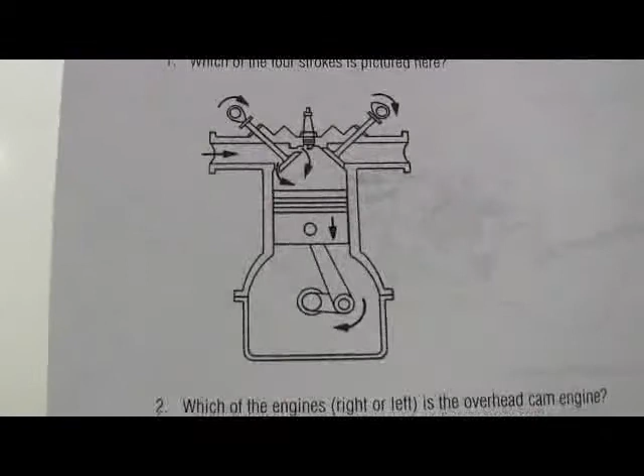Okay. Which of the four strokes is pictured in picture number 1? Which of the four strokes is pictured here? You gotta call on somebody. Huh? No, you gotta just call the answer. No, you gotta call on somebody. All right. Okay, Zach. Which of the four strokes is pictured in number 1? Intake. Okay. And how do you know this? I don't know this. I guessed. Second rate amateur.

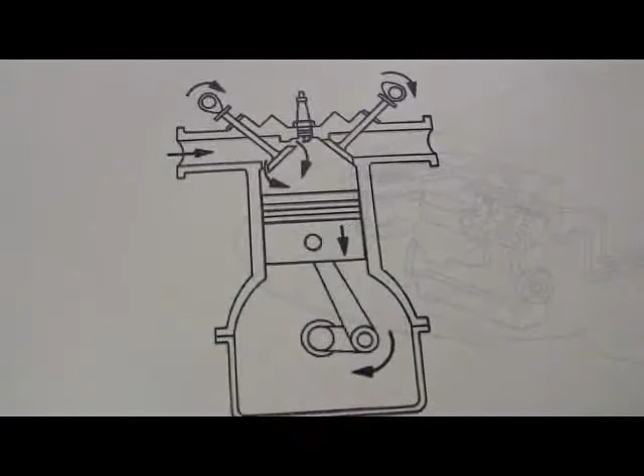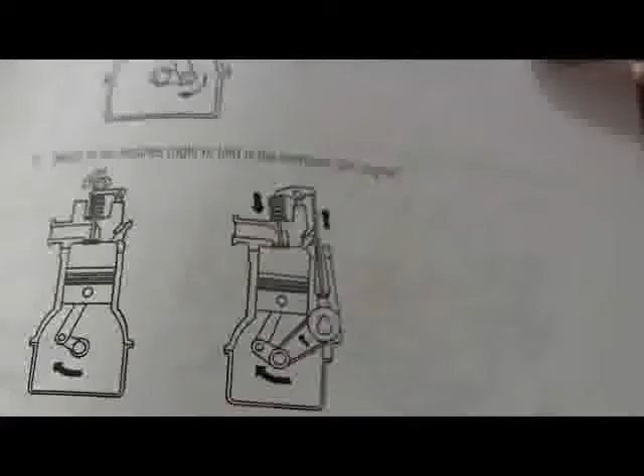Now then, on that next question, which one of those is an overhead cam engine? One on the left. That's right. You know the cam is on it. All right. Number 3.

He pointed the arrow left and wrote right. Just give it to him. You drew the arrow towards the left engine. Look at this. He put left, but wrote right. Who did that? Maybe he meant the left one. Brilliant. The left one's the right one. Outstanding performance. That's your other right. Okay. Well, he pointed an arrow at the right one, you know. So that's all right. Nobody knows. Okay, come on.

As related to oil, the word viscosity refers to what? Zach put 5W30. I have no idea. Viscosity? I mean, I don't know, it's the thickness of the oil. What does the word viscosity mean? Thickness. Yeah, thickness is a good answer. It's not contaminated. Well, no, viscosity has got to do with how it flows, or the thickness of it.

For instance, if I'm pouring vinegar, it's going to pour like water. If I'm pouring syrup, it's going to pour thick. And syrup is more viscous. That's what that's talking about. It's not talking about the purity of it. It's talking basically about the way it pours.

Okay, and finally, number 4, a 5W30 designation means what? The weight. I mean, W stands for winter, but I didn't know. W stands for winter. That's easy for you to remember, isn't it? Yeah. I remember that since the first day he told me. That's right. Matt Winters is going to remember that. What? So what are you saying?

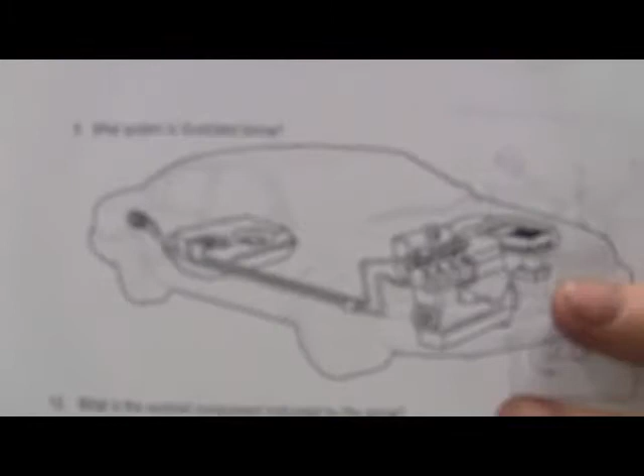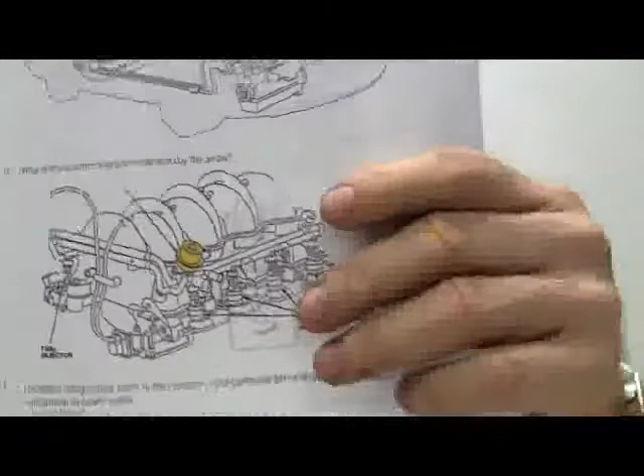Number 10, what is the colored component indicated by the arrow? And don't say it's the EGR valve, because if you do, you'll really crash on it. Intake vacuum? Fuel pressure regulator. Yay, baby! Fuel pressure regulator. There you go.

Okay, number 11. Octane rating simply refers to the volatility of that particular brand of gasoline. It has no relationship to power output. True or false? False. True. You got it wrong. What's the difference between the high octane gas and the low octane gas? What did I tell you about higher octane gas? Like you put 93 instead of 87, what are you getting? Fires at lower temperature. Actually, no. It actually burns slower.

It actually burns slower, and in an engine that's tuned for 87 octane, if you put 93 in there, it don't all burn. Some of it stays in there, and it turns into carbon, and you start getting carbon buildup on top of your piston and under your head because it didn't all burn. You got surface quenching going on and all kinds of other stuff, but the long and short of it is, if an engine is set up to run on 87 octane, you ain't helping it by putting 93 in it.

Eventually that carbon will build up, it'll raise the compression to the point where you can't burn anything but 93 in it, and then it'll get to where it pings when you do that, and you'll start getting a knocking sound because of that carbon. It's going to sound like you got an engine knock. It basically is a sort of engine knock, but it's because of the carbon in there, not because anything's loose down in the bottom.